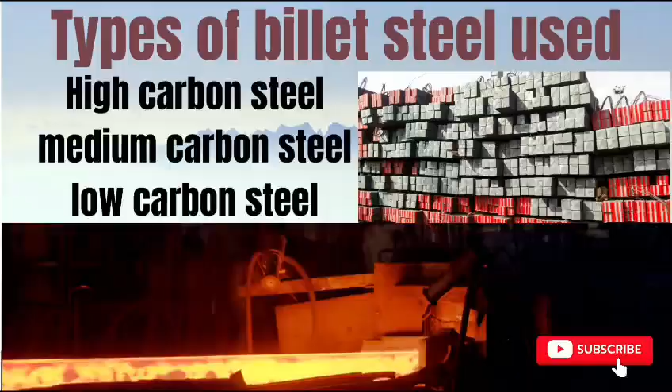Before charging the billet into the furnace, the steel grades are generally divided into high carbon steel, medium carbon steel, and low carbon steel, because different steel grades are required for different rolling condition properties.

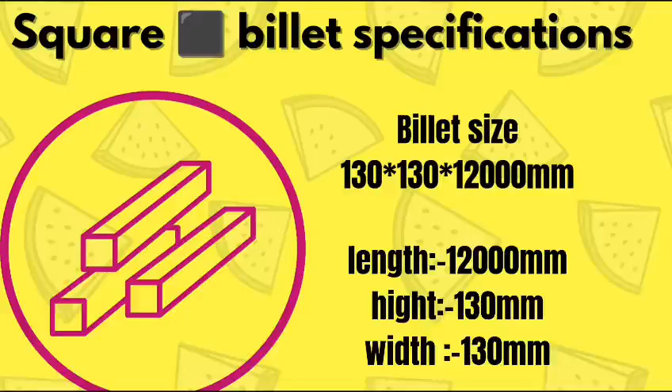Take the cold billet square. Size is 130 by 130 by 12,000 mm. Height is 130 mm, width is 130 mm, length is 12,000 mm. In the mill area, mill stands are divided into three different zones.

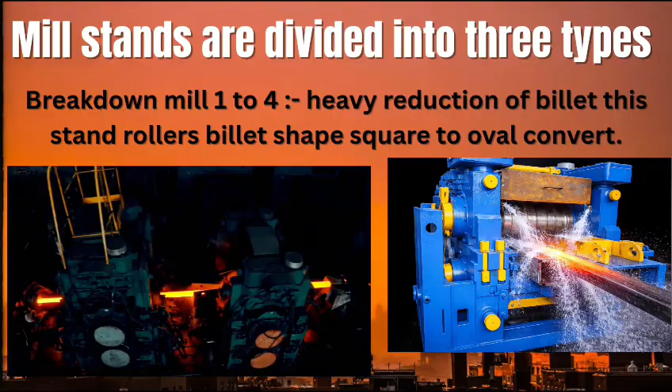The first zone is the breakdown mill, stands 1 to 4. These stands perform heavy reduction of the billet size.

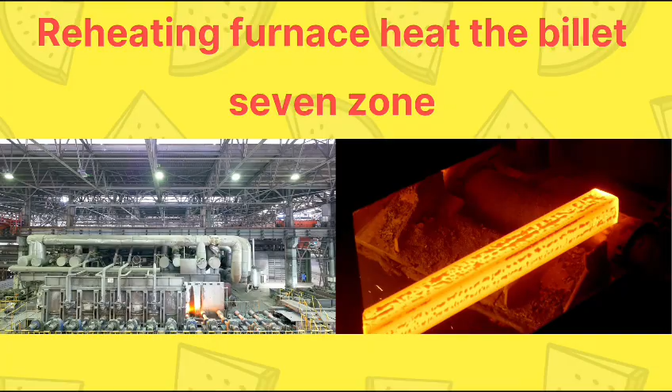The square billet is charged into the reheating furnace and heated to around 1100 to 1200 centigrade, up to its elastic limit. The billet is heated using 7 zones, top to bottom.

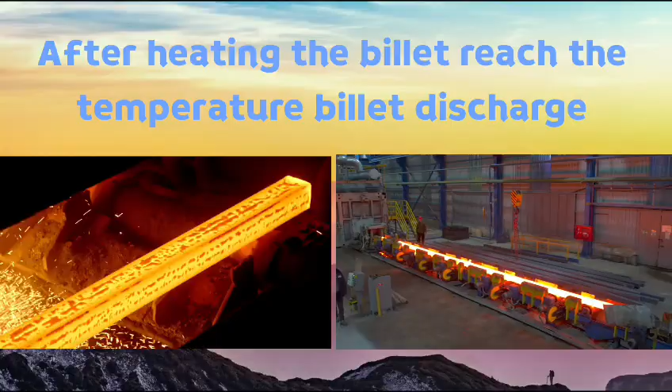After reaching the required temperature, the billet moves slowly to the furnace discharge door using a walking beam mechanism. The hot billet comes out of the furnace and falls onto the roller table.

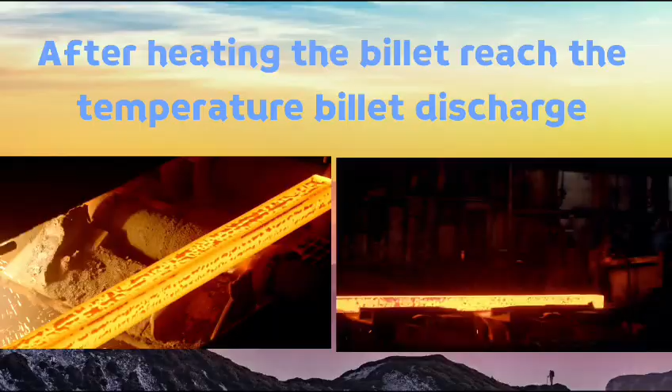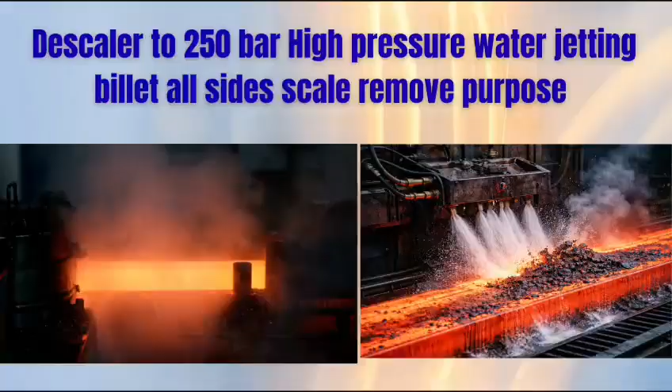At the furnace exit billet door, a descaler is situated. 250 bar high pressure water jets surround the billet to remove the scale from it.

After descaling, the billet moves to the insulated roller table, also called IRT. It consists of a series of rollers to move the billet. The pinch roller is located before the stand.

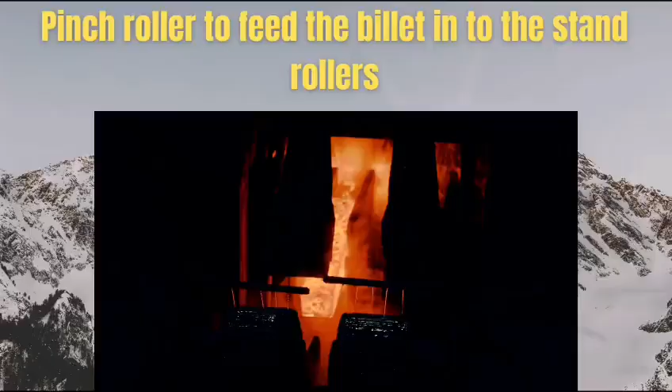The pinch roller reduces the billet speed and feeds it into the vertical stand in perfect alignment to feed into the two roller groove inside. At stand number 1, the square billet is fed into the vertical stand.

The vertical stand has two vertical rollers, both rotating in opposite directions. The hot billet passes through the center of the groove. Because of the rotation, the rollers grip and pull the billet forward. The billet is reduced from 130 to 110 mm, a reduction of 20 mm. Force applied to the sides converts the shape from square to oval. Billet speed is 2.2 meters per second.

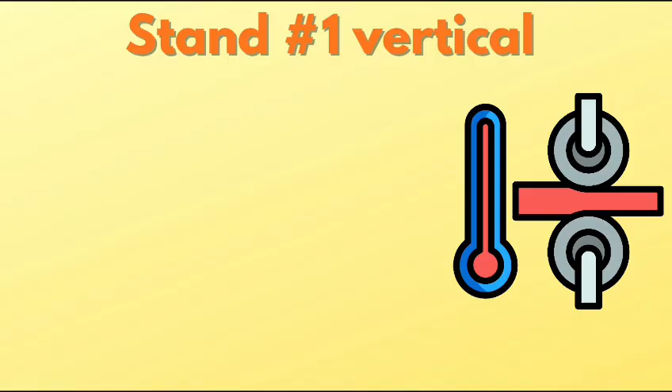Stand number 2 is a horizontal stand. The billet feeds into the horizontal stand with two horizontal rollers, both rotating in opposite directions. The hot billet passes through the center groove. Because of the rotation, the two rollers grip and pull the billet forward. The billet is reduced from 110 mm to 95 mm, a reduction of 15 mm, converting square to oval shape. The billet speed is 6.5 meters per second.

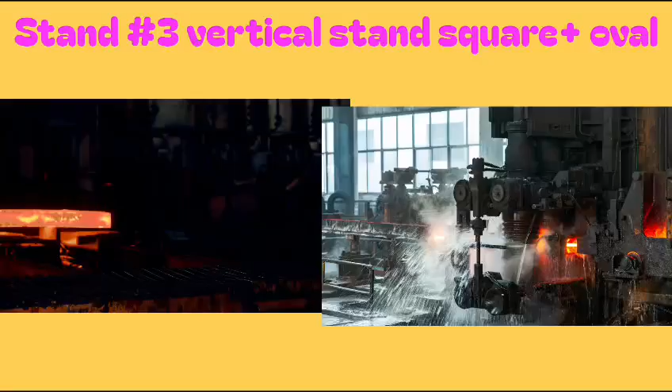Stand number 3 is a vertical stand. The billet passes through two vertical rollers, both rotating in opposite directions. The hot billet passes through the center groove; because of the rotation, the rollers grip and pull the billet forward. The billet is reduced from 95 mm to 80 mm, a reduction of 15 mm. Force is applied to the sides, converting the billet shape from square to oval.

Stand number 4 is a horizontal stand. The billet passes through the horizontal rollers, both rotating in opposite directions. The hot billet passes through the center groove rollers; because of the rotation, the rollers grip and pull the billet forward. The billet is reduced from 80 mm to 65 mm, a reduction of 15 mm. The force is applied top and bottom, and the billet shape converts from square to oval.

After stand 4, the billet passes through the insulated roller table IRT2, also called by its short form IRT2. A toggle shear is placed after IRT2 to handle billet misalignment so that passing cobble issues do not occur. The billet stops for cutting purposes and does not move further in the process.

The mill area is divided into mill stands across three different zones. Another zone is the second roughing mill. The roughing mill stands are the fifth to eighth stands, performing further reduction and shape change work.

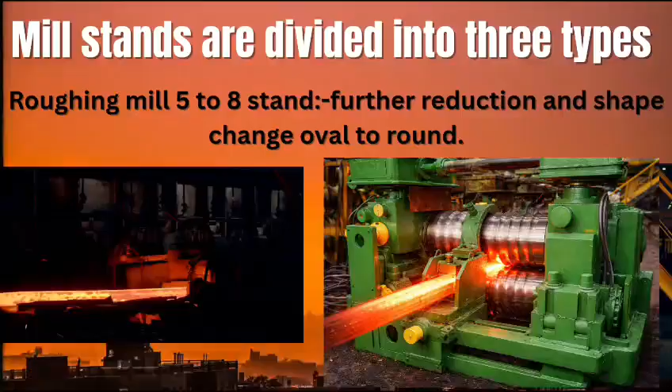The pinch roll is used to control and guide the billet, feeding it into stand 5. Stand number 5 is a horizontal stand. The billet feeds into the horizontal stand with two horizontal rollers, both rotating in opposite directions. The hot billet passes through the center groove of the rollers.

Because of the rotation, the rollers grip and pull the billet in the forward direction. The billet reduction size is 65 mm to 52 mm, a reduction of 13 mm. Force is applied by top and bottom rollers, shaping the billet from oval to round. Speed is 13 meters per second.

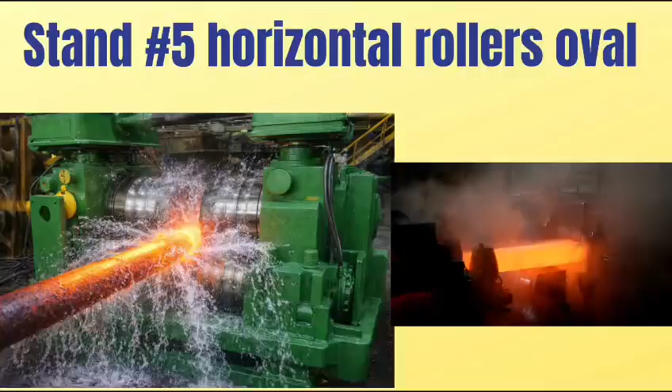Stand number 6 is a vertical stand. The billet feeds into the vertical stand through two vertical rollers, both rotating in opposite directions. The hot billet passes through the center groove of the rollers, and because of the rotation, the rollers grip and pull the billet forward.

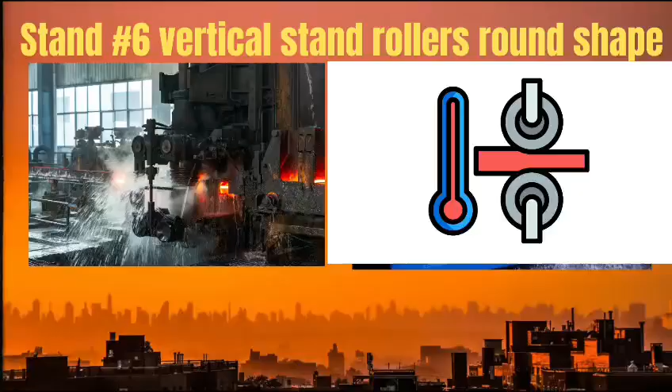The billet reduction size is 52 to 42 mm, a reduction of 10 mm. The force is applied on the billet sides, shaping the billet from oval to round.

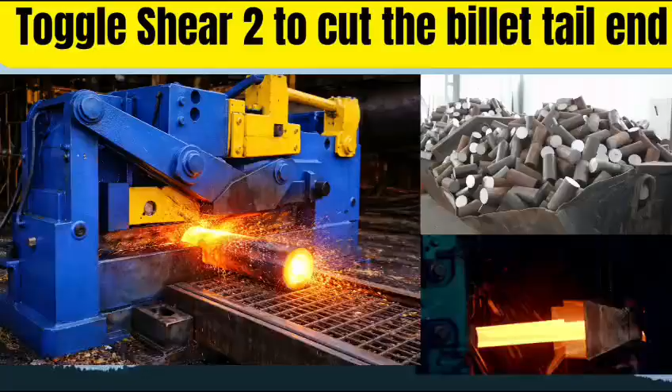The main toggle shear comes after stand 6. The toggle shear cuts the billet's tail end. The purpose of cutting the tail end is that the end part has improper squeezing and cracks, so it is cut off.

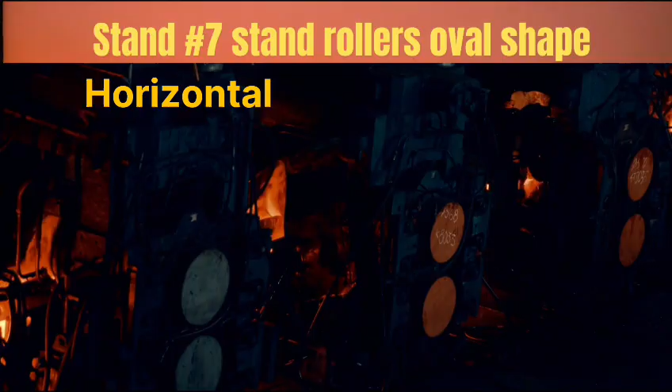Stand number 7 is a horizontal stand. The billet feeds into the horizontal rollers, both rotating in opposite directions. The hot billet passes through the center groove of the two rollers, and because of the rotation, the rollers grip and pull the billet forward.

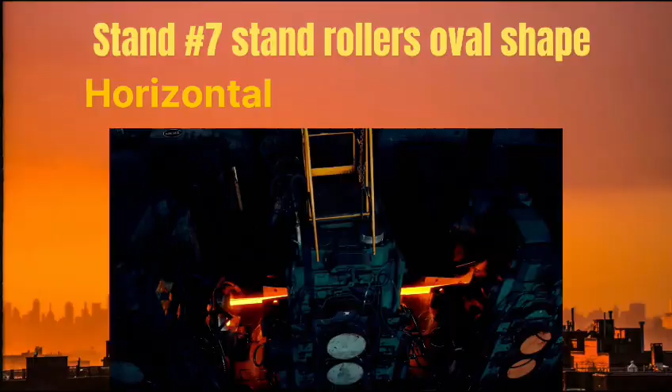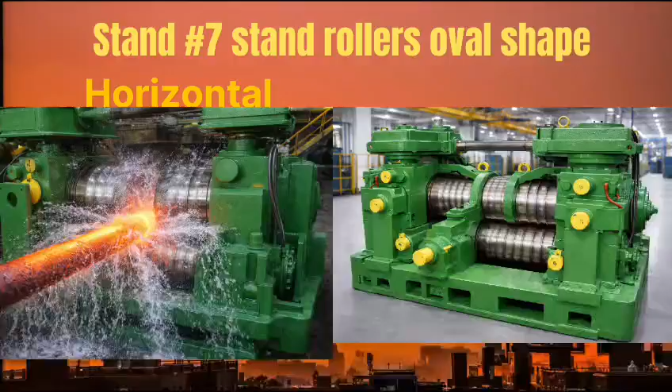The billet reduction size is 42 to 34 mm, a reduction of 8 mm. The force is applied on the billet top and bottom to convert the round shape to oval. The speed is 32 meters per second.

In the mill area, the mill stands are divided into three different zones. The third zone is the intermediate mill. The intermediate mill stands, from stand 8 to stand 14, prepare the material for the finishing of the billet.

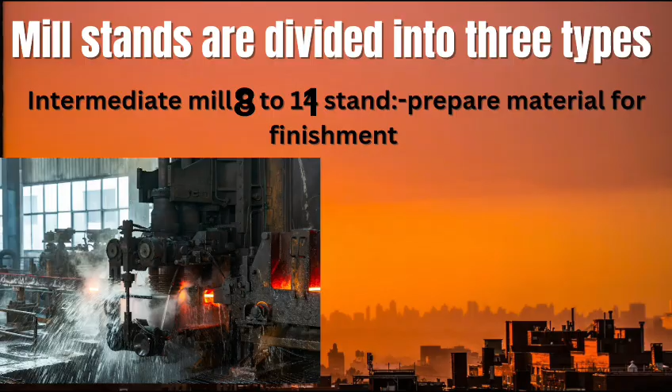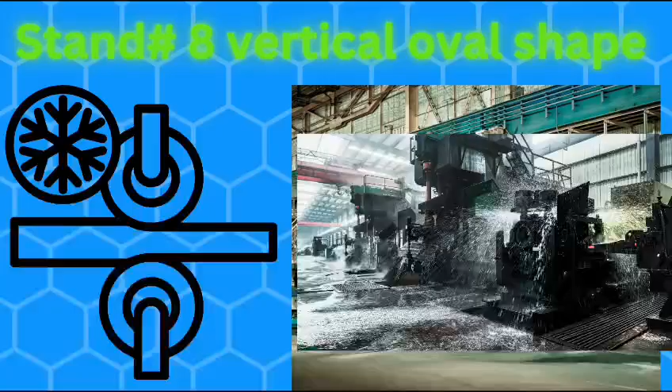Stand number 8 is a vertical stand with two vertical rollers, both rotating in opposite directions. The hot billet passes through the center of the groove rollers, and because of the rotation, the rollers grip and pull the billet forward.

The reduction size is 34 mm to 26 mm, a reduction of 8 mm. The vertical stand's force is applied by sides only, converting it to the oval shape for finishment of the billet.

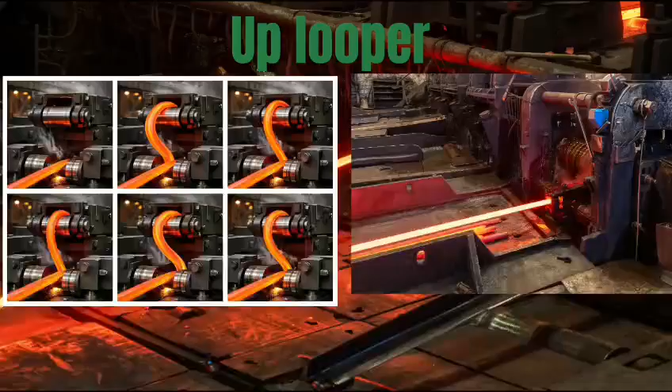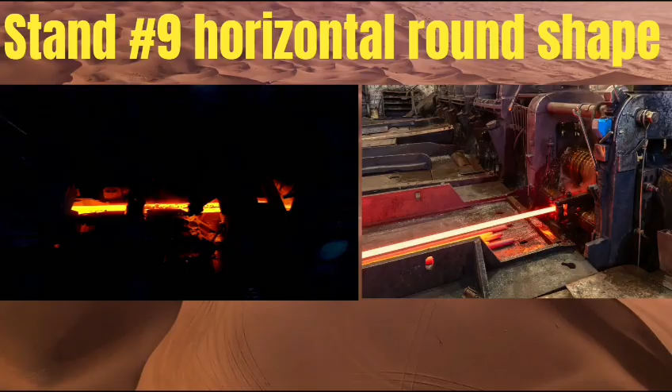Stand number 9 is a horizontal stand. The billet feeds into the horizontal stand through two horizontal rollers, both rotating in opposite directions. The hot billet passes through the center of the groove rollers, and because of the rotation, the rollers grip and pull the billet forward.

The billet reduction size is 26 to 20 mm, a reduction of 6 mm. The force is applied on the horizontal stand's top and bottom, converting it to round shape and finishment.

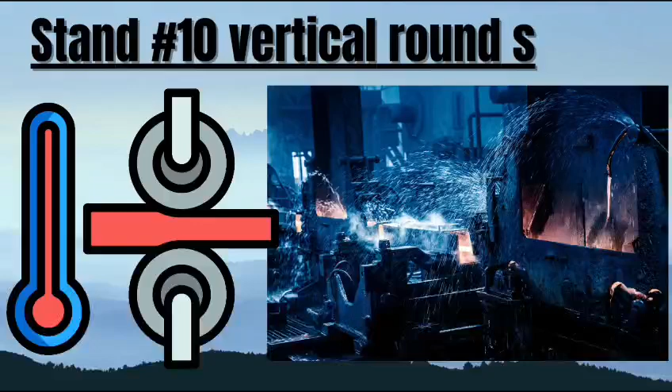Stand number 10 is a vertical stand. The bar feeds into the vertical rollers, both rotating in opposite directions. The hot bar passes through the center of the groove rollers, and because of the rotation, the rollers grip and pull the billet forward.

The billet reduction is 20 to 18 mm, a reduction of 2 mm. The force is applied on the sides only.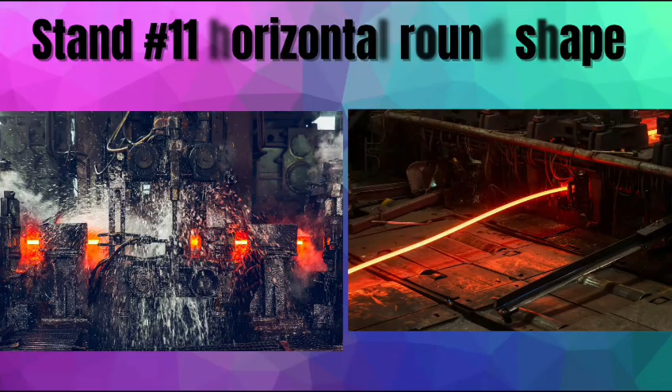Stand number 11 is a horizontal stand. The bar feeds into the horizontal rollers, both rotating in opposite directions. The hot bar passes through the center groove of the rollers, and because of the rotation, the rollers grip and pull the billet forward.

The billet reduction size is 18 to 16 mm, a reduction of 2 mm. The force is applied from top to bottom to convert it to the round shape.

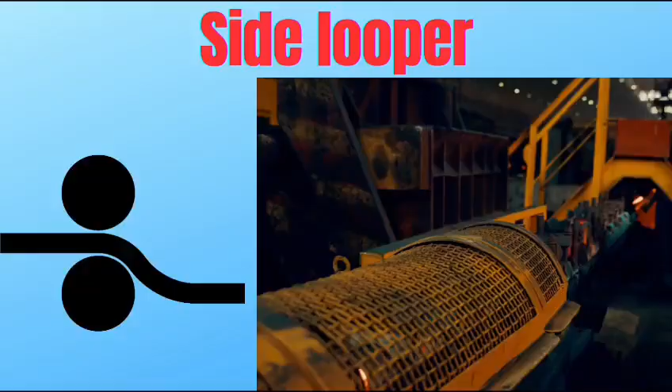The side looper works like a buffer, forming a loop on the side to balance speed between the two roller stands, keeping the bar stable.

Further process will be explained in the next video, part 2.